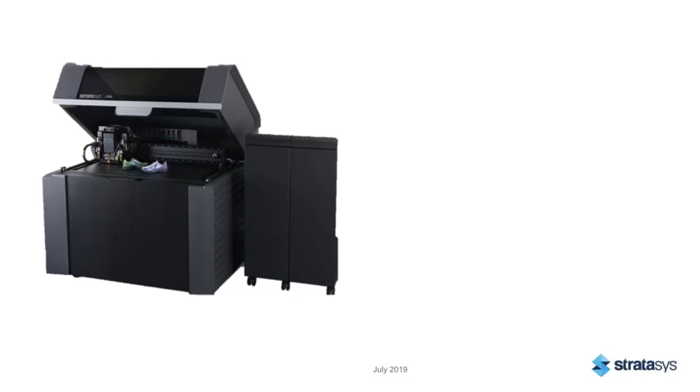Today, we're going to talk about 3D printing flexible parts using the Agilus 30 family of materials on the Stratasys J750 and J735 series 3D printers.

Agilus 30 is our strongest polyjet material with elastomeric properties. It's extremely flexible and provides high tensile strength as well as high resistance to tearing. Agilus 30 can also be mixed with rigid polyjet materials to achieve a range of shore values, or hardness levels, and various types of colors.

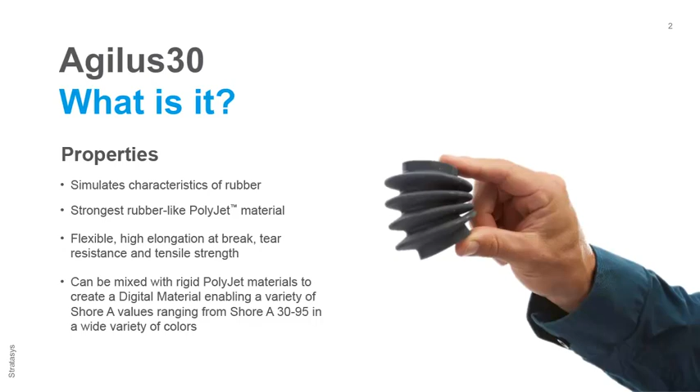In terms of applications, Agilus 30 is well suited for parts requiring soft touch or rubber-like characteristics. Some of the top examples include various consumer goods, sporting goods, general prototypes, overmolding, medical models, and tooling. But we'll do a deeper dive into those applications later.

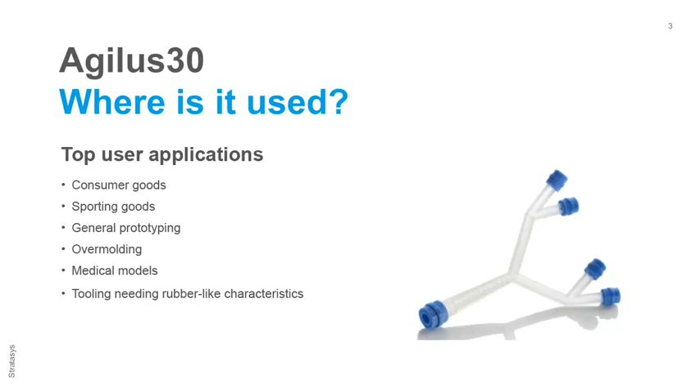For colors, Agilus 30 is available in clear, black, and now white. The white option is what really allows you to explore color. It can be combined with various textures to create vivid, photorealistic colors, or even gradients.

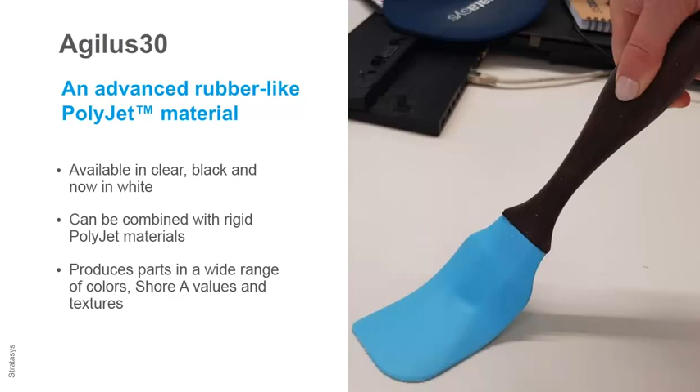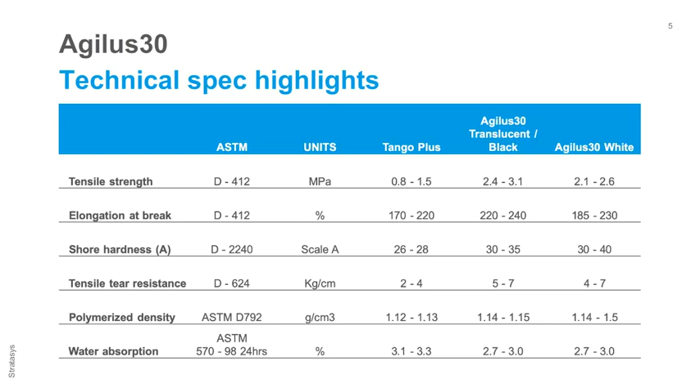From a technical standpoint, the material performance of the Agilus 30 family can be broken down into two categories or subgroups. The first group is translucent and black, and the second group is white. The performance values shown under each of the subgroup columns are the default values if you were to print a part with only that material.

However, when you mix other materials with either of the Agilus 30 materials, you'll be able to change or enhance the performance properties. For example, mixing a more rigid material like Vero with Agilus 30 will result in 3D printed parts with different shore values, mechanical properties, and even colors than a part printed in just the Agilus 30 material.

Combining Agilus 30 white with other rigid materials can help you achieve a specific shore value in addition to achieving a specific color, such as when you mix it with Vero or Vivid Vero materials. Together, these materials can create a colorful, flexible, and rigid part.

When you have a higher percentage of the rigid, colorful material included in the mix, the harder the part will be. Conversely, the higher percentage of the Agilus 30 white you have in the mix, the softer your part is going to be. Remembering this will help you choose your colors and hardness and softness levels accordingly so you can achieve the color, flexibility, and shore value that you require.

Agilus 30 white and Vivid Vero colors can also be combined to achieve colors that mimic the look and feel of real-life materials, such as wood, leather, fabrics, stone, and marble. This can be extremely useful if you're trying to achieve realism in the 3D part or piece you're designing.

Another application that Agilus 30 white is well suited for is multi-material, multi-element models, where the goal is to create a part in a single print that looks and feels like the final product. You can incorporate elements such as full-color graphics, textures on flexible materials, rigid and soft materials, and color.

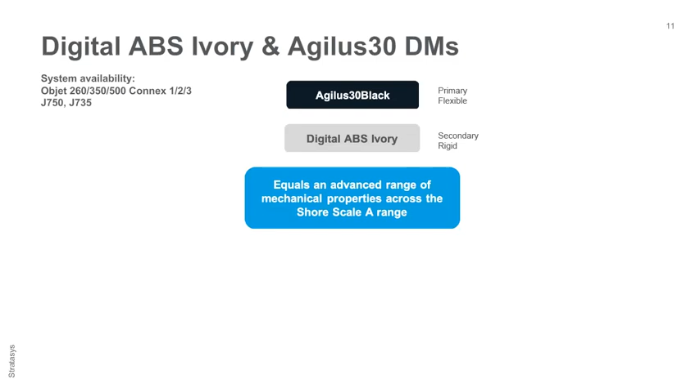Now, when you combine an Agilus 30 material, whether it's white, black, or clear, with a high-performing digital material like digital ABS Ivory, you can achieve a range of mechanical properties in a range of shore values. This allows you to iterate and tweak the material mix to ultimately create a 3D printed part that meets your specific design requirements.

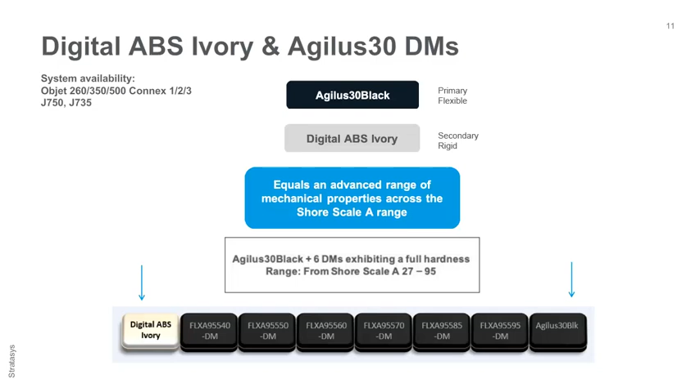So when it comes to designing parts, what applications are Agilus 30 best suited for? The answer is really a wide range of applications across any number of industries.

Agilus 30 can be used in general prototyping to create rubber-like components, surrounds, and overmolding. Some examples of this include prototypes for hand grips, motorcycle handles, and other soft-touch parts.

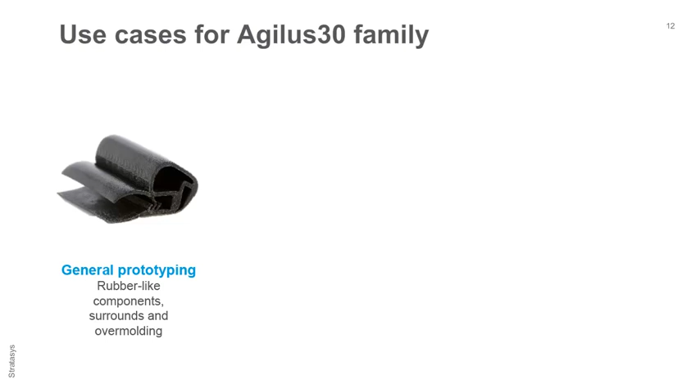It can also be used to dial in on a design for a range of consumer goods, including sporting goods, food storage containers, door seals, and a whole range of products that you may use in your day-to-day life.

Agilus 30 is also well suited for creating complex medical models because it can mimic the way tissue and body components feel. It's also great for tooling and assembly jigs. For example, you can create areas with soft coatings to ensure you're not scratching polished or freshly painted part surfaces.

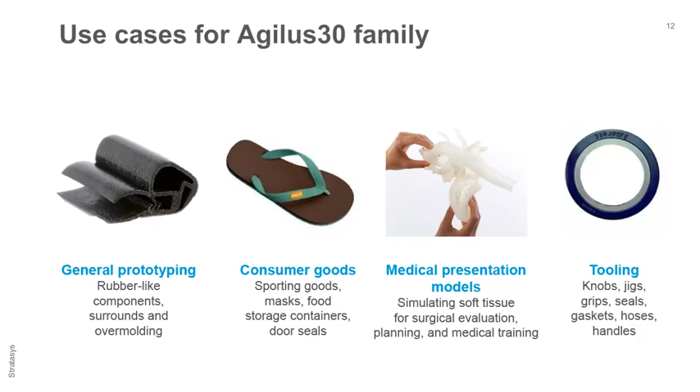Beyond those four areas, the list of applications that Agilus 30 can be used for is pretty extensive, such as shoes, toys, seals and gaskets, engineering-type components, even masking for paint.

Masking for paint is definitely an application that the custom side of the automotive industry uses quite frequently. With Agilus 30, you can print a series of masks for the part and paint on top of it, helping you achieve repeatable, multi-layer painting effects on large, complex parts.

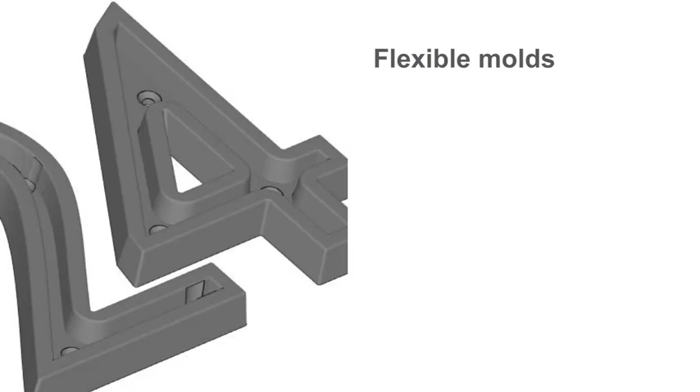Agilus 30 can also be used to make molds, shortcutting the typical silicone mold-making process. 3D printing molds with Agilus 30 allows you to maintain a digital inventory of your molds, so you don't have to worry about storing the physical molds once you're done using them. Just throw them out.

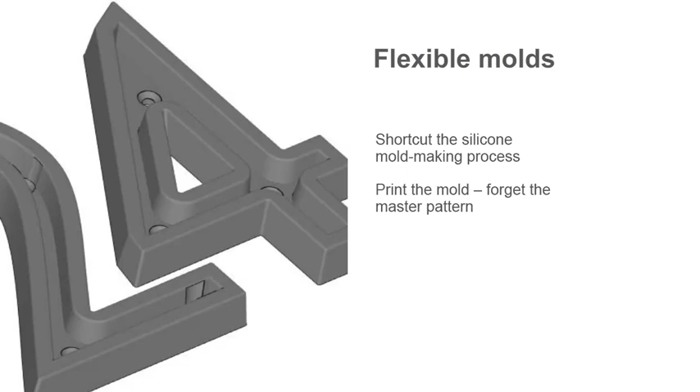And if you need to reproduce the mold again in 6 months, or even 2 years, just hit print. Now, let's look at how Agilus 30 might be used to simulate the soft components of an armrest for a vehicle interior.

Traditionally, designing a prototype for this type of application would involve a time and labor-intensive multi-step process, where you would first start by CNC or handcrafting of the base, then manually prepare, apply and stitch the leather, hand paint the buttons, and finally, assemble it all by hand.

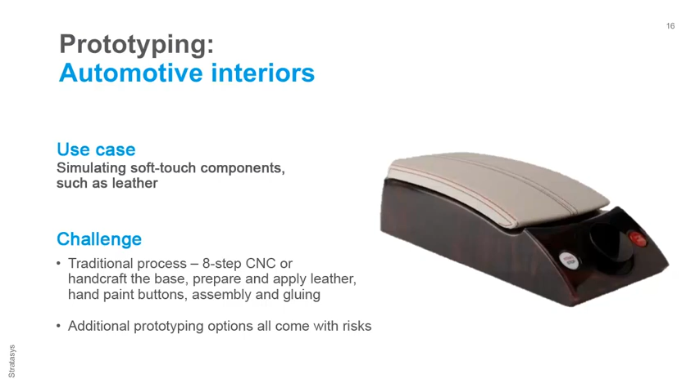But with 3D printing, the most labor-intensive part of the whole process is designing the CAD file, which an experienced designer can complete in a day. Once the file is built, you just hit print.

You can also mimic the wood grain effect, as well as simulate the soft-touch leather element with the Agilus 30 material, all in one print.

This allows you to validate a series of leather swatches in a number of colors, grain sizes, and thicknesses against various types of wood grains in a single step, helping you shorten the prototyping process and reach a final design decision quicker.

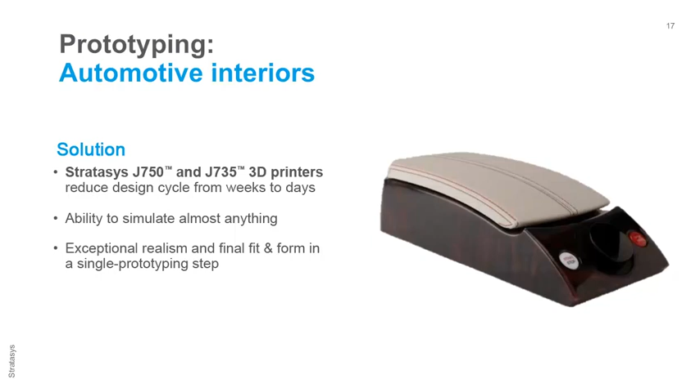From a cost standpoint, designing this armrest using traditional methods would cost around $10,000. But with 3D printing, prototyping the armrest would come in just under $2,000, about an 85% difference in cost.

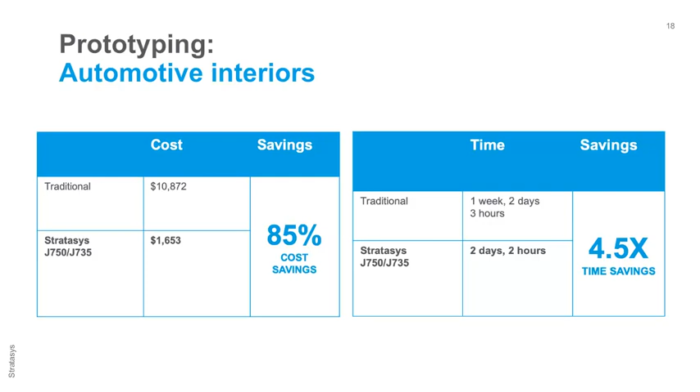Additionally, designing with traditional methods would take a little over a week, whereas 3D printing would allow you to design, print, and finish the armrest in about 2 days.

For another example of the time and cost savings that can be achieved using 3D printing, let's look at the toy industry. When creating new toys, traditional prototyping methods have typically consisted of a multi-step process involving a master modeler, mold making, and rotational casting.

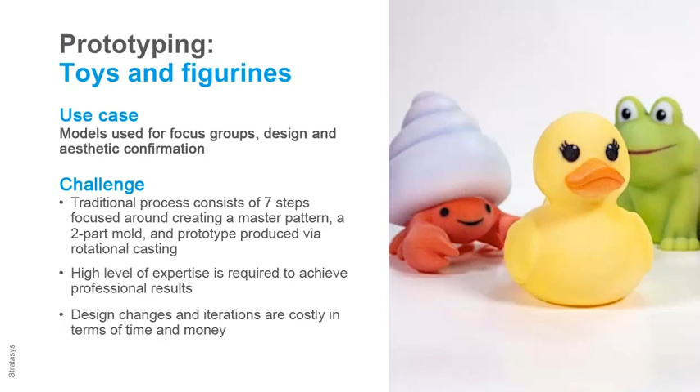This process can quickly become very time and labor-intensive, as well as expensive, especially when you need to make changes or iterations on designs. Plus, repeatability can be a challenge.

But by leveraging 3D printing, you can easily make multiple variations in a shorter amount of time, sometimes shortening the prototyping process by up to 95%.

With Stratasys J7 series 3D printers, you can also make your prototypes look, feel, and function like the final product, helping you make better design decisions.

And with Agilus 30 materials, you can achieve the soft parts and flexible rubbers that toys often feature. Plus, 3D printing is a single-step prototyping solution, so you can iterate on designs quickly with accuracy and repeatability.

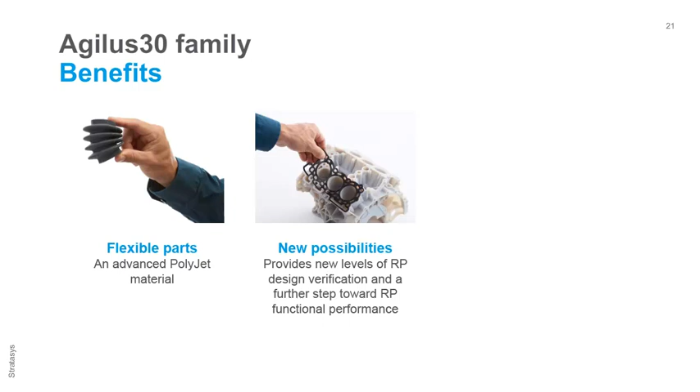In summary, 3D printing with the Agilus 30 family of materials allows you to create flexible parts, discover new possibilities in terms of the look, feel, and function of your designs, and fly through processing with the help of soluble support, which eliminates the need to cut away any supports after your part is done printing, and means you can go from print to part in no time, without compromising the detail of the finished product.

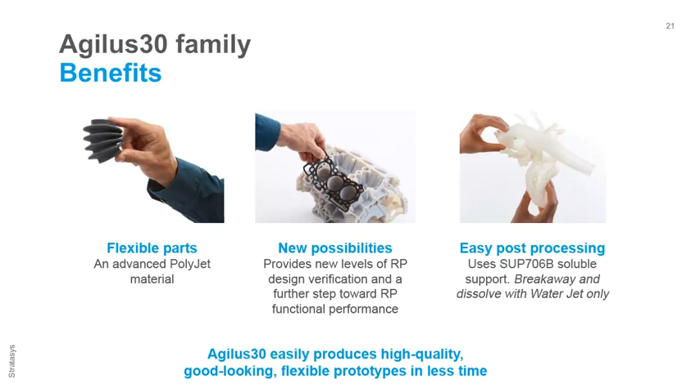To make it easier for you to get started with Agilus 30, we've created easy-to-print predefined palettes that will help you select the exact color and flexibility that you need for a project.